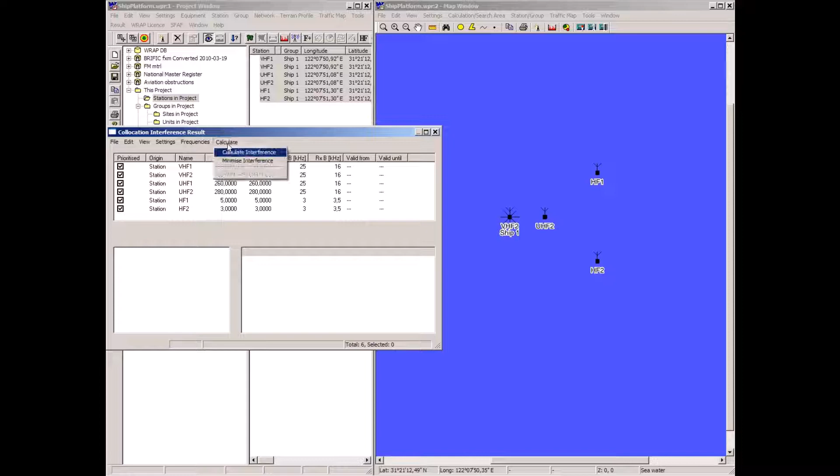So let's check this installation for interference. I mark all stations, select the collocation interference tool, and it starts with showing the stations and their frequencies, transmit receive frequencies and the bandwidth and so forth. So to calculate the interference, I press the calculate button and I'll expand here. Worst interfering victim, at least the one with the most interfering cases on it, is UHF1.

So let's start to check what that amounts to. This interference type has 5 cases of it. Co-channel or adjacent channels interference. There's no co-channel here, so it is adjacent channels. And the worst interference condition is from the HF transmitters, actually. So they contribute with noise, or the receiver, UHF receiver, does not suppress sufficiently.

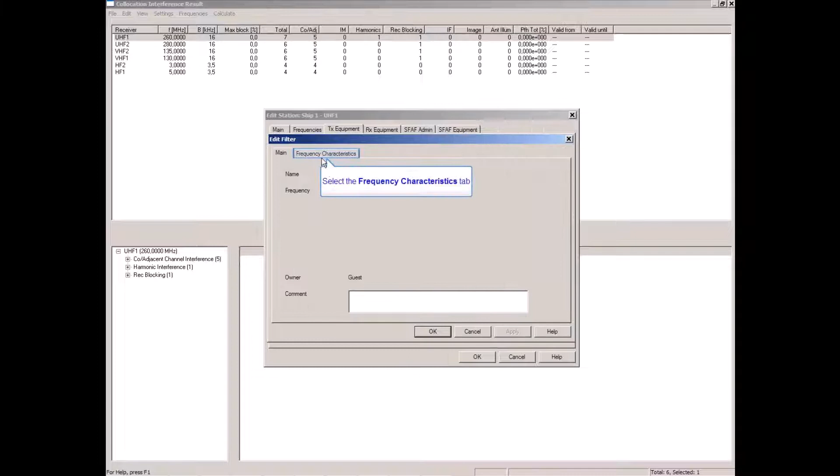So a quick attempt to fix this situation is to put filters on the receivers and perhaps also on the transmitters. So let's start with the receiver 1. I'd put a collocation filter on it, and there are a few selections here that are suitable. This one has a selectivity appearance like this, so it attenuates at most 60 dB, 2 megahertz away. So it is quite a good narrow filter for this purpose. So let's use that.

And now it says station data recalculate. So I recalculate. And we still have interference on UHF1. Let's see what that comes from. Yeah, it comes from these stations, and they also contribute with a lot of interference from the transmitters. We have cleaned up the receiver of UHF1 now, so let's continue with the transmitters here, VHF1. Similarly, let's put a filter on it.

So we have one, yeah, I'll use the same. This 400 megahertz, as it says, it is tuned anyway for the calculation purposes. It is tuned automatically to the assigned frequency of the transmitters and the receivers. So we can just put it on there and see what the result is.

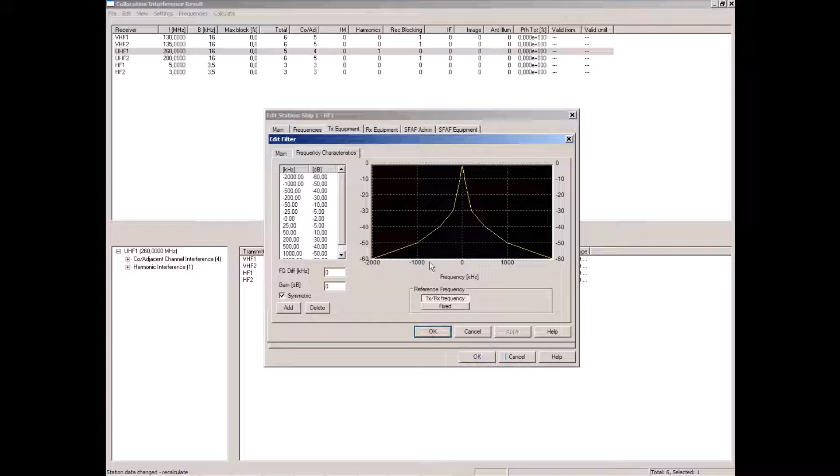For the HF stations, I will put on an HF collocation filter. It has similar characteristics, or actually it is much narrower, because this is so much lower frequency, so it's possible to make more selective filters there. Okay, and lastly on HF2.

Okay, so let's recalculate and see what still is there. Yeah, we have some interfering cases. UHF1 that we started with is okay now. So what about this one? It is interfered with by UHF2. The amount of interference is about 5 dB. It has a margin of minus 4.6 dB, and this is in effect the noise increase experienced by receiver VHF1 due to the interference from this transmitter.

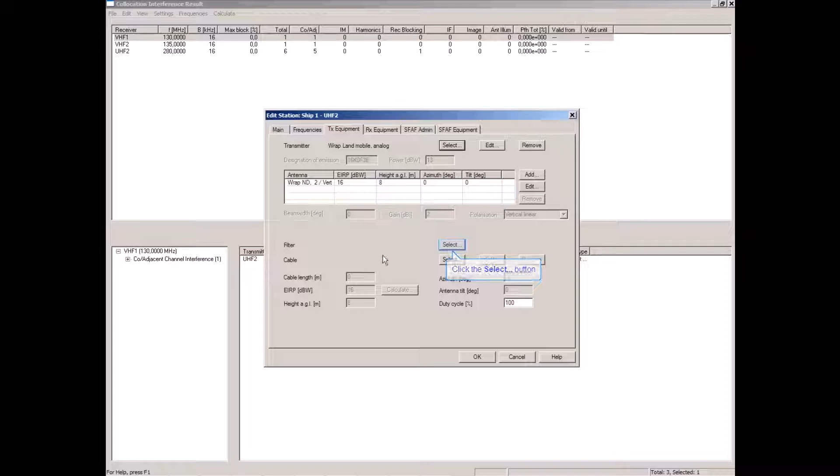This UHF2, let's put a filter on that one also. And VHF1, did we put a filter on it? Yeah, it has a filter already. So now recalculate. Now the list is empty, so we have cleaned up the situation completely. There is no longer interference. We can view interfered receivers or interfering transmitters. There are no interfering transmitters either, so this is a good situation now.

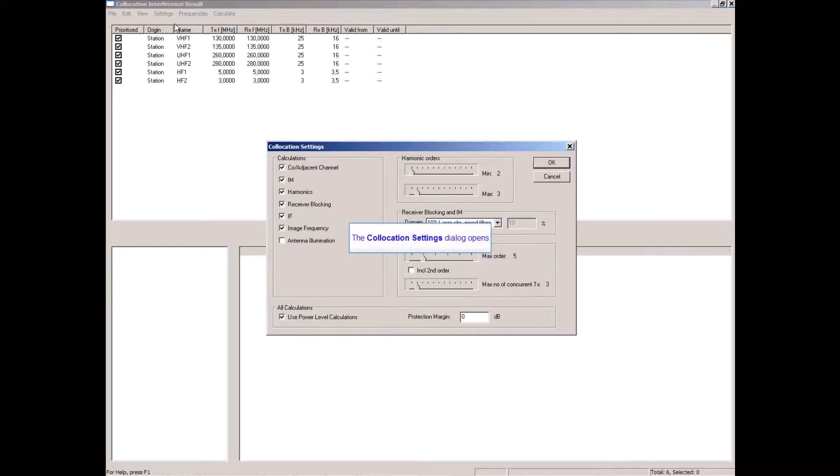The collocation interference tool has lots of settings, and it considers adjacent channels and co-channel, of course, intermodulation, harmonics, receiver blocking, intermediate frequency feed-through, and image frequency. Harmonic orders up to 13th, intermodulation order up to 13th also, and maximum number of concurrent transmitters, also 13. It's very seldom that these numbers have to be used with this high order of intermodulation and this large number of concurrent transmitters. But the capability is there, so it can be used.

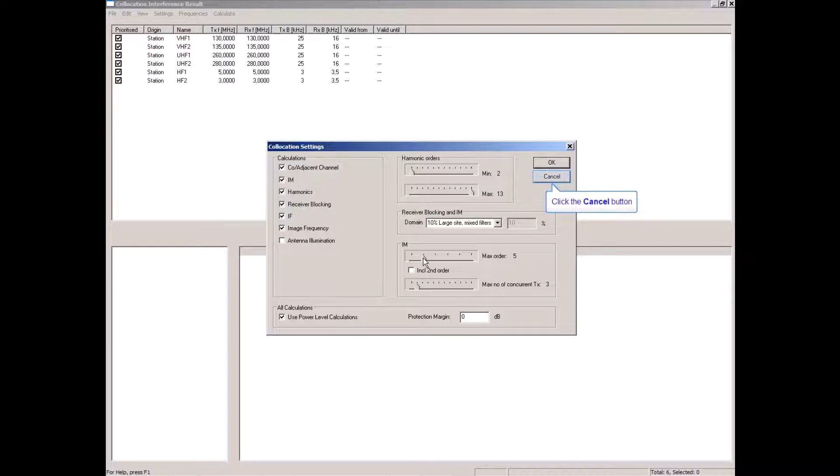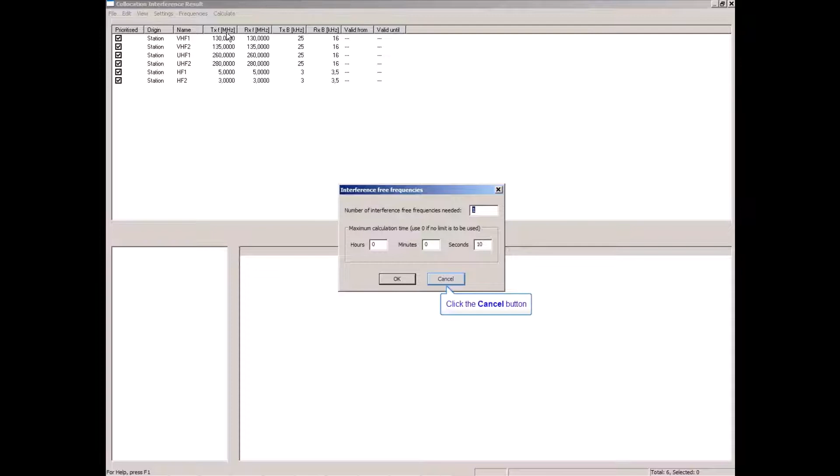WRAP also has a feature of minimizing interference, and this is used to create interference-free channel plans. In a co-location situation, it may be quite difficult to find frequencies that are free from intermodulation and adjacent channels interference. So WRAP can automatically analyze, synthesize, and generate such interference-free frequency tables.

Okay, so this is a clean setup now. No inherent interference between the transmitters and receivers.

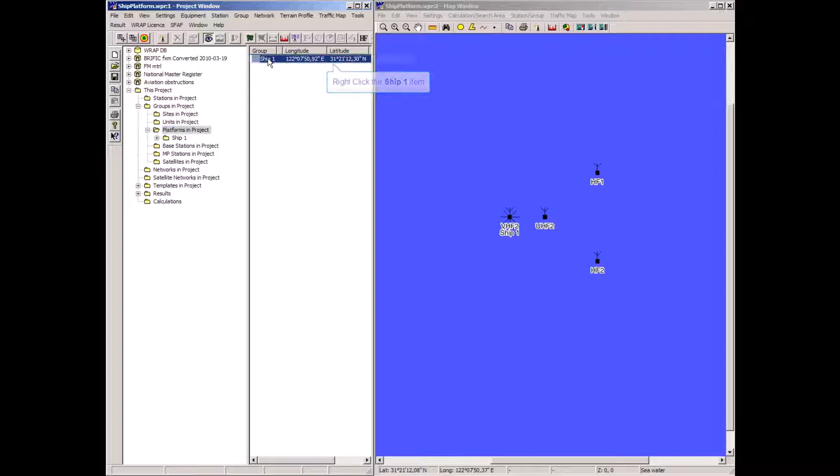So let's check what happens if we put another ship in the vicinity, and that is a quick operation. To create an identical ship, I just make a copy of the platform and drag it somewhere there, for instance. Well, these two are very close to each other now, so let's make a collocation interference calculation on this setup.

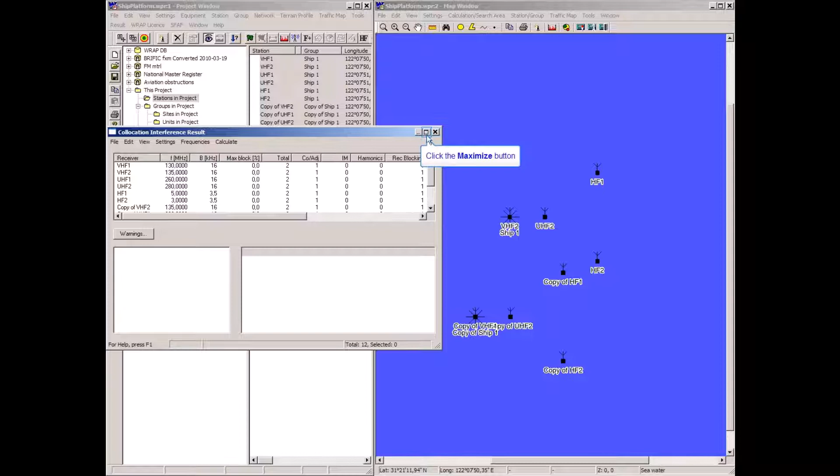Okay, there are two cases of interference on each of the receivers, and it is quite evident what it is. It is co-channel, since they are identical twins. One ship is transmitting on 130 megahertz, and the other tries to receive on that frequency, so there will be a very large amount of interference between the two if they try to operate independently.

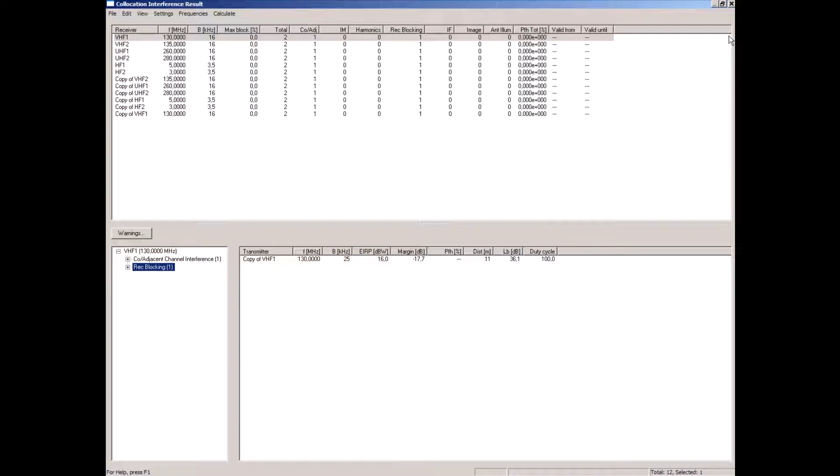So that's quite evident, and similarly the blocking effect of the receiver. So that's not a real surprise. This situation cannot be cleaned up apart from changing frequencies or moving the ships apart. Let's continue with another example, and now it will be remote interference.

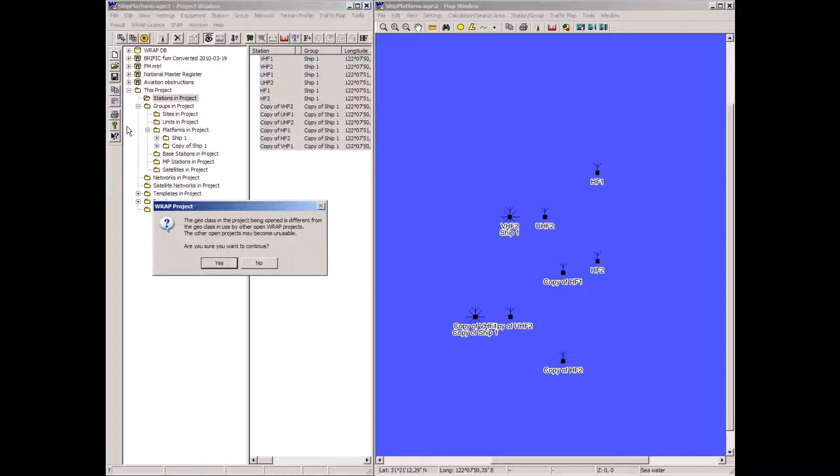So I'll close the ship project. I don't save the changes, and let me move the windows so they are clearly visible. This project contains a number of stations. The ones that are called FH are frequency hopping stations, and they operate on a 10 megahertz wide band, 40 to 50 megahertz, with a channel separation of 25 kilohertz.

So that's 400, or actually 401 frequencies in the hopping sequence. 40 and 50 megahertz are both included in the hop sequence, so it will be 401 frequencies. The antennas are at 24 meters above ground level, radiated power 40 watts, 16 dBW.

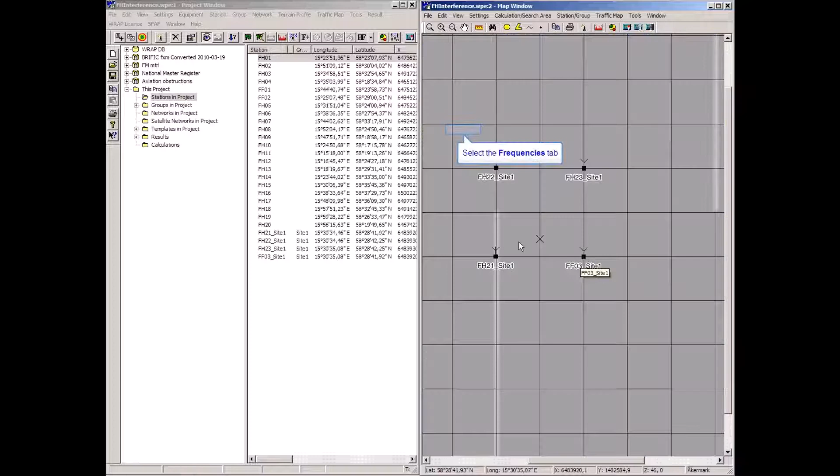We'll have a particular look here at this site where there are 4 stations. So we'll zoom in there and see what it looks like. This is the site then. They are separated by 10 meters. Each square here has a 5 meter side, so they are located in a square of 10 by 10 meters. FF03 here is a fixed frequency transceiver, operates in the middle of the hop band, 45 megahertz, and the other 3 are frequency hoppers.

So let's check this for interference, and I will use the remote interference function of WRAP. It accounts for the interference of the nearby transmitters also, but it does not consider intermodulation and receiver blocking and a few of the other things that are particular to the collocation interference function. Calculate the interference, and here we have a mix of fixed frequency and frequency hopping stations in this project.

What the result now shows is that the sensitivity limit of fixed frequency 03 is minus 110 dBm. It experiences interference at minus 48 dBm, total interference, and let's have a look at what that is. It is fixed frequency interference from FF01 and FF02. They are remote from here, so it may very well not be interference. It may be the wanted signal actually that it is communicating with.

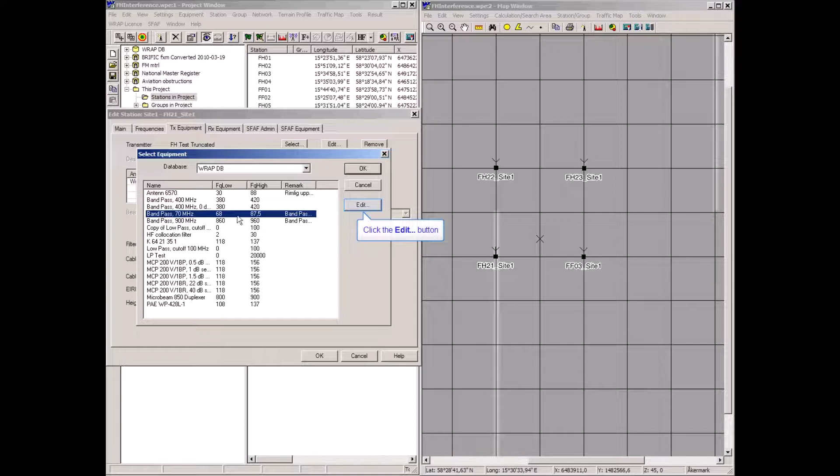But of course this can't be. We have to do something, and the general recommendation in a situation like this is to test with filters, and of course we will use that. And this bandpass filter, 70 megahertz, has a selectivity characteristic that is reasonable to implement in a frequency hopping filter that tunes along with the hopping radios. So we'll make use of that.

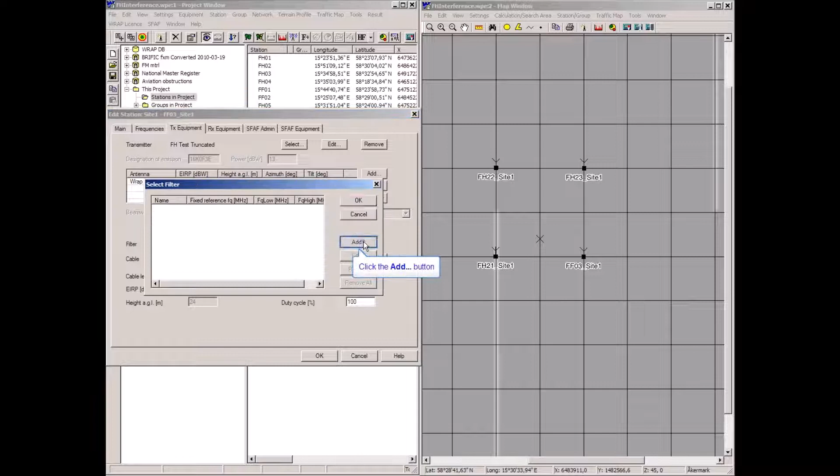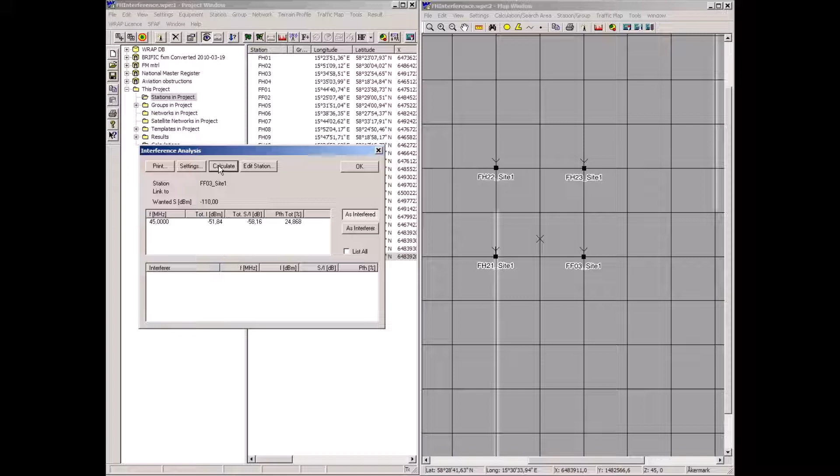And I'll use that filter on all stations that are involved in this collocation situation. And we also need to put it on the fixed frequency receiver. So there we are, and now we recalculate and see what improvement we gained from using this configuration instead. Now, the total probability from all the frequency hoppers of interference is about 25% in time.

So each of them contribute about 8% to the interference. And of course, depending on the error correction coding and the signal processing of the receiver, this may be okay, or it still may be too much, but that depends on the quality of the coding, or how much redundancy for the data transmission is available.

The others, the more remote frequency hoppers, each give this contribution, 0.249%, and that is just 1/401, since they hop on 401 frequencies. At any instant in time, looking at a single frequency, the probability that the hopper is on that frequency is 1/401. So that's why we get that value. And again, the fixed frequency interference level is calculated, and it may be interference if they really are supposed to operate in different nets, or it is actually wanted signal level if they are in the same net.

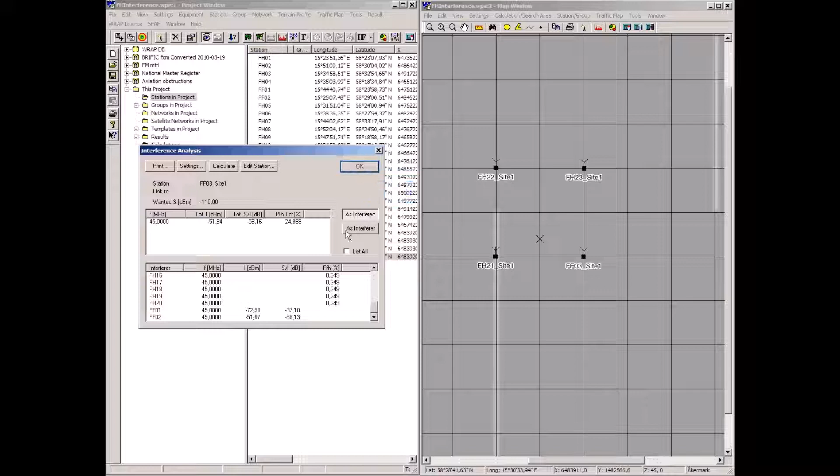Then we'll make a third example, and this is to demonstrate interference analysis for general EMI emitters, electromagnetic interference emitters. In this case, there are two receivers, one at 60 megahertz, one at 400 megahertz. Then there are four what we call EMI emitters, electromagnetic interference, and they are defined according to the two.

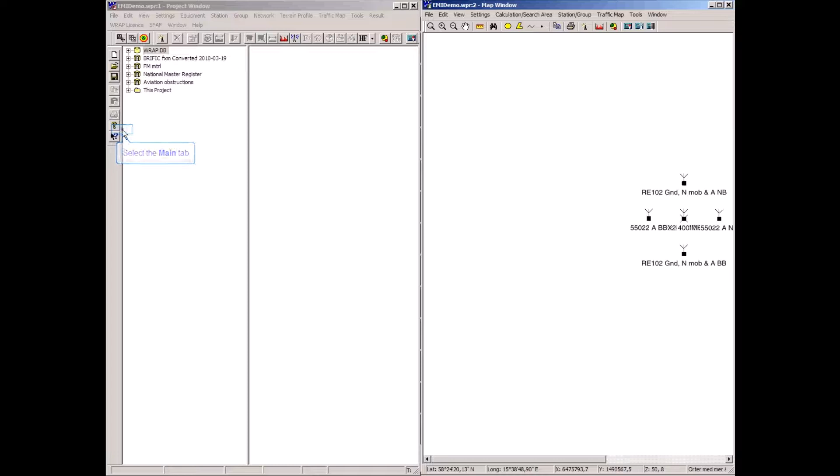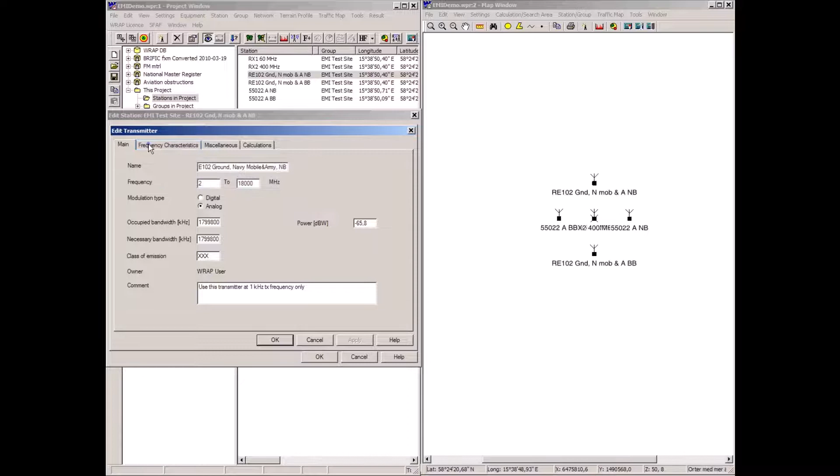These two, RE102 ground, means radiated emission 102, and that is definitions from MIL standard 461. It's narrowband definition, broadband definition. So the spectrum of this is taken from a transmitter that we have created, WRAP EMI RE102 ground, Navy, mobile, and Army narrowband. And this is the spectrum with frequency and level, and it defines the spectrum of that emitter according to the MIL standard.

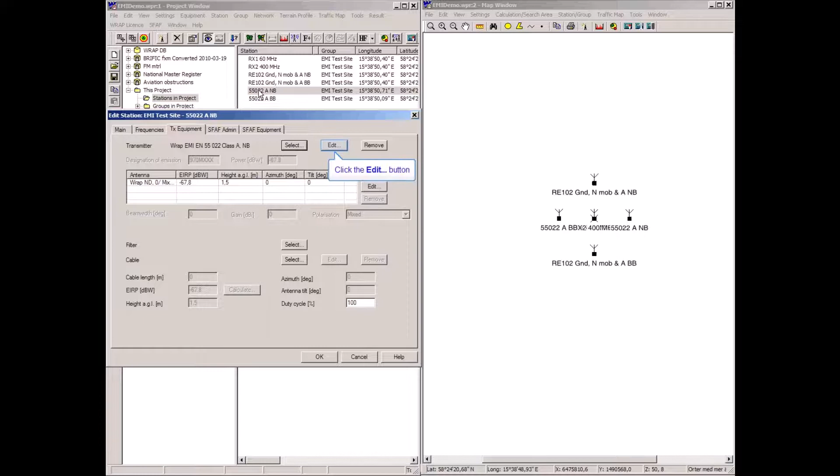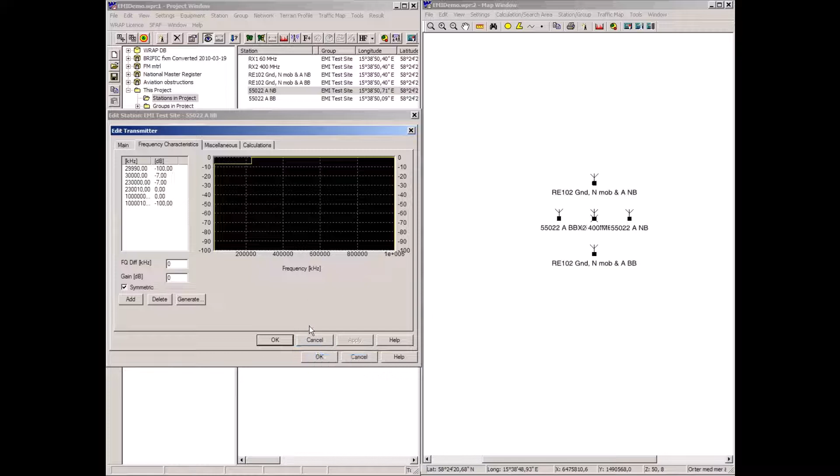These two are European civilian standards according to EMI reference standard EN 55022, Class A narrowband. These look like this, and that step may be that at that frequency, the reference bandwidth, the measurement bandwidth for the standard is changed. The separation here is 5 meters, with receivers in the middle, and the interference emitters are around. Typically, the 55022 standard can often be applied to standard PC computers, desktops, laptops. So it is a representative situation to try to receive radio signals with computers only 5 meters from the antenna. So let's check the interference that these receivers will be subjected to.

Okay, having a look at the 60 megahertz receiver. We'll expand this a little. It can be seen here that the worst interference is for the broadband definition of RE 102, the MIL standard. No, I read that column in error. It's the margin we should read. Of course, the worst is the civilian standard narrowband definition. So actually, the computers are allowed to radiate narrowband radiation that will degrade the sensitivity of this receiver by 53 dB. The broadband noise will degrade, or may degrade, we should say, because this is what they are allowed to radiate. They perhaps do not radiate that much.

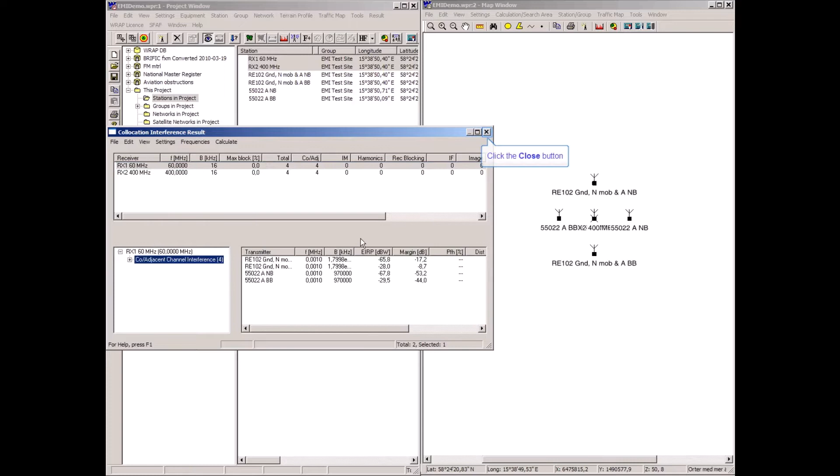So WRAP has a lot of capabilities in analysis of interference, both remote interference and collocation interference, including consideration of radio transmissions and generally defined EMI, electromagnetic interference emitters.